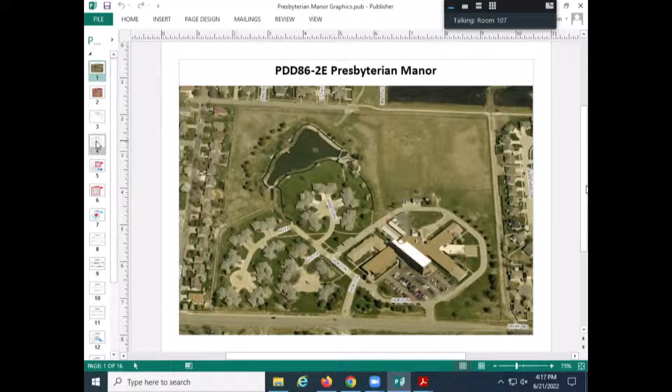Phase 1 was the original plan, as I mentioned, happened in 1977, and that was a plan to go from A1 to R2, and we do have a copy of the most recent plan. Phase 2 happened in 1986 and added 5 duplexes. In 1994, phase 3 occurred, which was an additional 5 duplexes, and then in 1997, 7 additional duplexes were added for phase 4, and then there was a phase 5 redevelopment, really the 5th phase, or 5th rendition of amendments for this particular property, in which a memory care facility was added to the main structure of the facility and the campus.

And so that brings us to phase 5. Our last phase was amended in 2005. Phase 5 is a proposal for 29 new cottage-style, single-family structures in the vacant space north of the existing development. So here on the screen, you've got a drawing of the entire campus, and that shows the 2 main things that we're looking at today: the 29 new cottage-style units, as well as an addition for what they call their wellness center. Their wellness center has things like pools, workout exercise rooms, things of that nature for the residents. So those are the 2 things that we'll be looking at for this particular amendment.

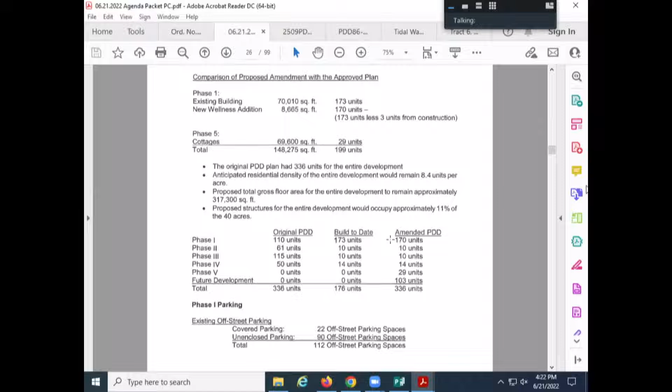Above this table, we also have a breakdown of some of the bulk qualities that the particular property has. So the original development had 336 units. The applicant is maintaining that density, with 103 outstanding potential units being added later. The anticipated density for the entire development will remain 8.4 units per acre, consistent with the original plan. The proposed total gross floor area will be a little over 317,000 square feet, with the overall lot coverage occupying 11% of the total 40 acres of the site, which is less than what you typically would find for a residentially zoned development.

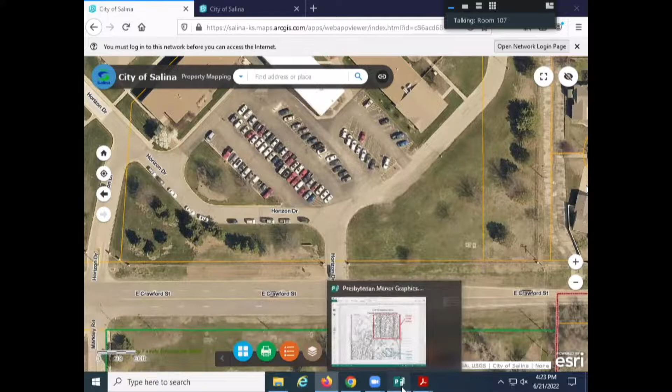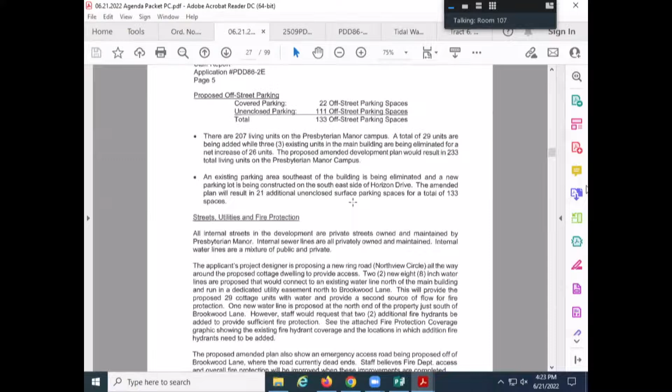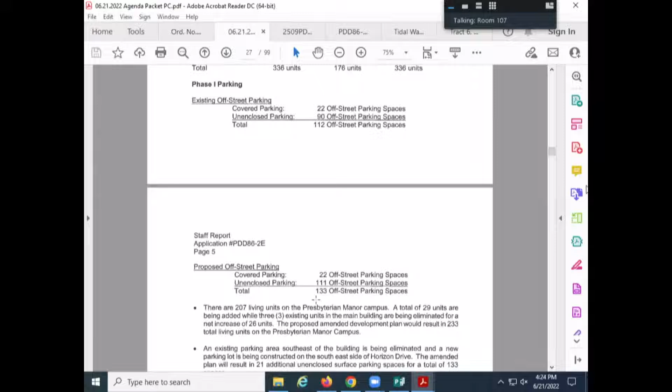So here's a zoomed in example of what we're looking at, and this is the new parking. The parking table created by the applicant for our review today shows that originally there are 112 off-street parking spaces, 22 covered and 90 uncovered. After the proposed addition and replacement of the parking lot, the new parking capacity will be 133 off-street parking spaces.

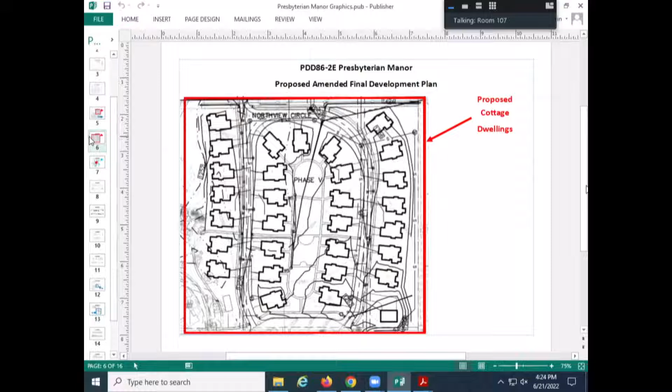When we're looking at streets, utilities, and fire protection, we're looking at what street access is being provided - are they private or public? What water access is being provided - private or public? Same thing with our sanitary sewer and our storm drainage.

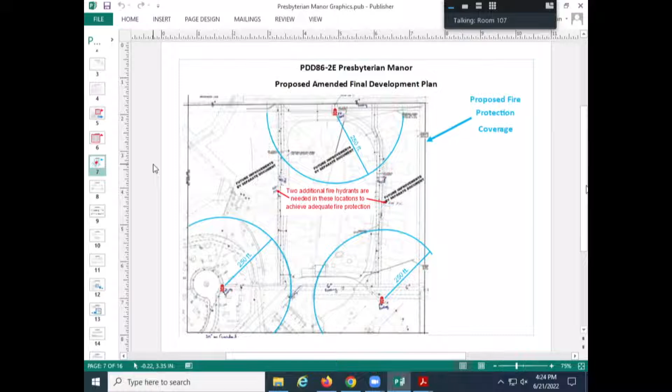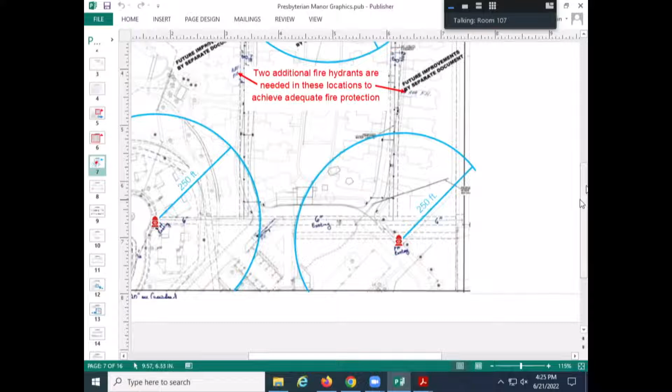On the screen is a site plan drawing showing the location of existing fire hydrants in relation to the proposed dwellings, as well as existing and proposed water lines. Down here on the south side would be the main building. North of the main building, there's an easement for water lines, and in that easement there's a 6-inch water line. The applicant is proposing two 8-inch water lines that would connect to the 6-inch line, run north, and proposed utility easements up to Brookwood, where you have an existing 8-inch line.

There will be a similar parallel line on the west side, so you have two 8-inch lines that connect the 6-inch line existing on the Presbyterian Manor property, looping back into the 8-inch line in Brookwood. That is how water will be serviced to the site - it would be a public line and would require a public easement.

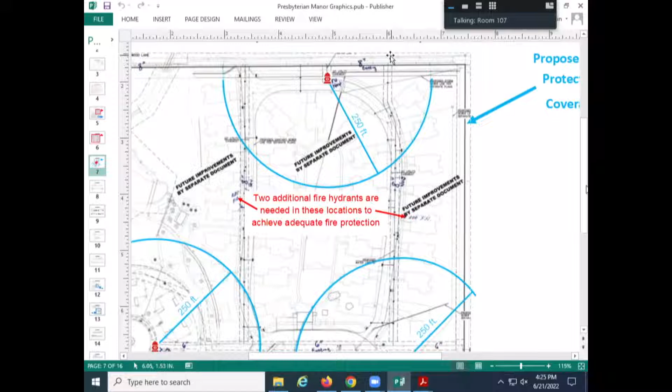One thing staff did note when doing their analysis from both a utility and fire protection standpoint is that while we have good coverage to the south and potentially to the north, we do have a number of units that are uncovered under the current plan. At least 2 fire hydrants will need to be added along that utility easement to have full coverage of all the units being looped around.

For street coverage, there is an existing private drive, and what the applicant is proposing is a drive called Northview Circle that would also be private and would loop into the existing drive all the way around to provide access for the 29 units.

There's also a connection for emergency access onto Brookwood Lane. Brookwood Lane is not fully developed because directly north of this property we have county farm ground, so before Brookwood Lane can be fully built out and constructed, that property to the north would need to be platted with right-of-way dedicated to have the full width of right-of-way all the way to Holmes. At that point Northview would connect directly to Brookwood, but for the time being, the applicant is proposing a temporary fire access lane for emergency purposes.

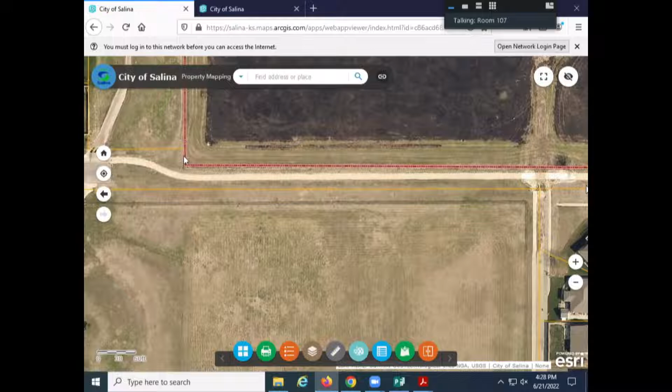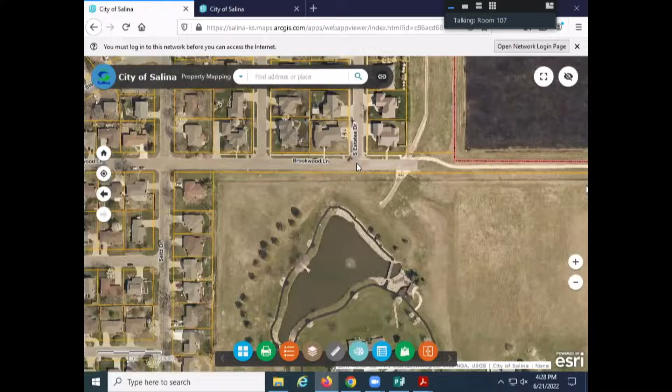You see this pink dotted line - that is the city limit line, and this is all undeveloped county ground directly to the north all the way over to Holmes Road. At some point when this becomes developed, Brookwood would go all the way through and you would have sufficient right-of-way for the street paving, but for the time being, the applicant is proposing a temporary access point in which emergency access could reach the Presbyterian Manor facility off of the Brookwood Lane dead end.

And that's what that looks like here on the drawing.

So when we look at planned development district amendments, we look at whether it's a substantial change from what has been previously planned and approved. On page 6, you'll see some of those criteria.

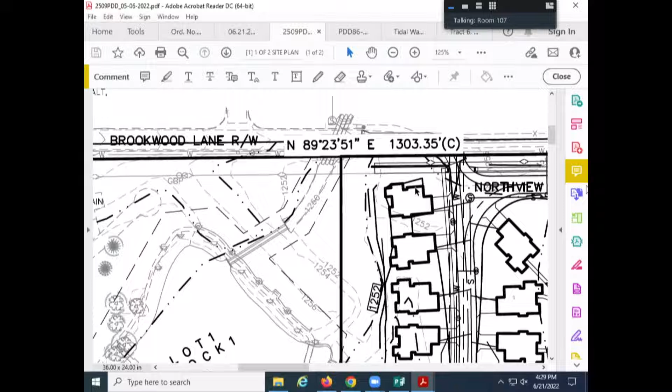As noted when we went over the table provided by the applicant, staff does not see any significant changes in terms of density. We're still looking at 8.4 units per acre, and a lot coverage of 11%, which the R2 regulations would allow up to 35%. So those would not be major changes.

The ordinance itself, the 1977 ordinance, number 8569, staff believes has become outdated over time. If you were to read it, it doesn't give staff, future or present landowners, developers, architects, or designers much guidance on the bulk regulations and how to administer the existing plan of the PDD. So it's vague and requires amending and updating, particularly because of its age and the number of times the existing PDD has been amended—amended 5 times, with this being the 6th.

Staff believes the ordinance should be updated as we go through this process. When we move forward with potentially taking this to the city commission, staff will work with the applicant to produce a new ordinance for the commission's consideration.

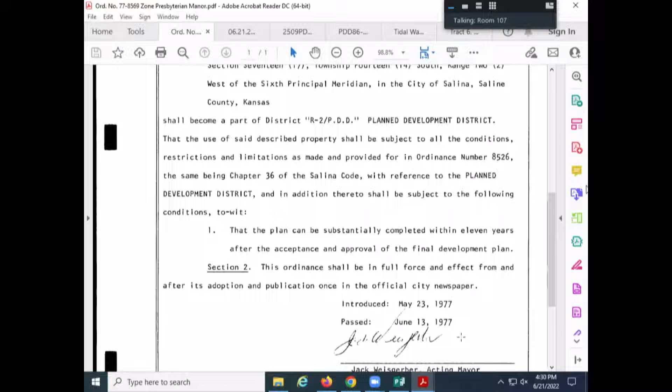Some comments or thoughts staff has with the proposed plan involve some confusion that could be cleared up by the applicant. We'll walk through those items. One is that the plan needs to clearly delineate the boundaries, areas, and square footages of Phase 5, which is brought up because we have two different areas.

We have the 29 cottages on the north side. Staff arbitrarily used a boundary of the north property line, the east property line, and the black line shown on the site plan, with an arbitrary line to the south, just to get a feel for the area. Staff would be more comfortable if the applicant quantitatively defined the specific area we're dealing with, so we can calculate the lot coverage not just for the whole campus, but specifically for Phase 5.

It would also help us identify setback requirements and proposed setbacks. Because of the elevation changes on this property, there's quite a bit of contour change, and those contours on the plan make it difficult to pick up other important lines, such as water lines, sewer lines, curbs, street dimensions, and whether easement dimensions match up with the proposed water lines. Having some layers of information removed, like contours, and making other layers easier to read would be very helpful to staff.

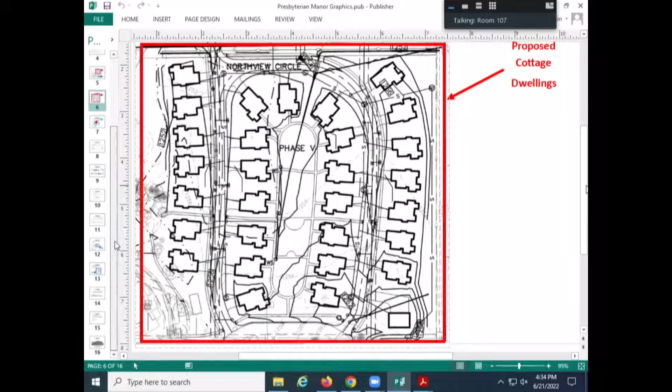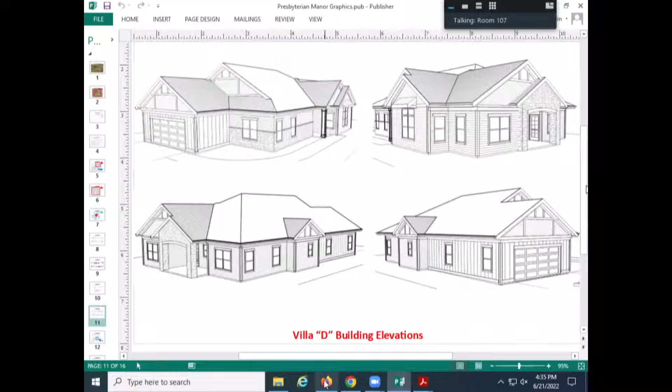So there are 4 different models. They all have different footprints and different building elevations. One of the things staff could help clarify is having the footprints match the proposed dwellings and where they're going to go, as well as having them identified—meaning this is an A model, this is a B model, this is a D model, this is a C—and then having their square footages noted, since they do have different square footages. Having that information more tightly tuned would also help when you get to the point of working with the applicant and issuing building permits.

Number 3, provide a profile of the proposed private streets, including the right-of-way and paving widths, if right-of-way is being proposed, or if they're completely private, at least the utility easement dimensions associated in those areas. It appears to staff that there is a utility easement that runs roughly underneath the street, but they are not completely synonymous—some parts overlap and other parts do not. Having information on what that street is and where the boundaries of the street are in relation to the dwelling units that connect to it would be very helpful.

Number 4, provide a proposed internal private street name for the private streets that connect Horizon Drive to Northview Circle. That is where I'm showing my cursor here. When you come into the Presbyterian Manor, the first road you'll see is Horizon Drive, which goes on the west side and kind of the south and east side of the main facility. There are some other offshoot streets that branch off of Horizon Drive for the previous duplexes developed on the site. One thing the plan is missing is a name for the street that's going to go off of Horizon Drive to the north side of the facility that connects to the proposed Northview Circle.

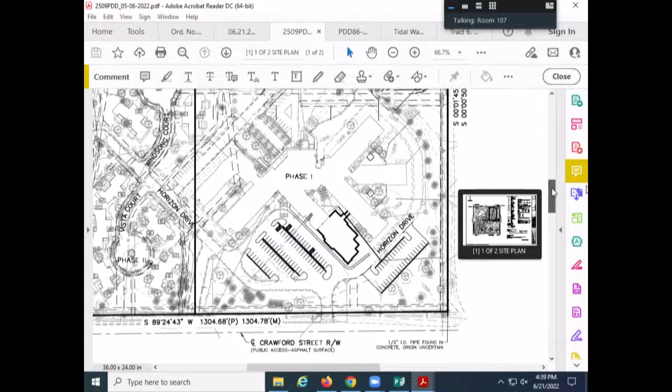At the public hearing, we would also request that the applicant provide staff with additional information on where post-development runoff for Phase 5 is being directed. The campus does have a pond with a dual purpose of stormwater retention as well as recreational use. We would like confirmation of whether this is where stormwater is being run to, and if not, information on whether it's going to the northeast, and how we're going to get the water across the ditch up here.

There is some bottlenecking we've been experiencing with the ditch. There's a drainage ditch that runs north-south and discharges onto this field at a point near this path, and that particular point is kind of a bottleneck or choke point that's currently causing some water flooding or backup in the northeast corner. So we would have the applicant's engineer address that issue.

And then the wellness center itself that is being proposed at the southeast corner of the building, what all that is being proposed for, or what all the uses are. It looks like from the plans that there's a swimming pool and an exercise area, and we would ask the applicant to describe how that fits in with the operations of the facility, if it's open to other people in the public. Some facilities like this have a membership where they have a pool or an exercise room that could be used for the residents, but also has an ability for other people in the neighborhood to purchase a membership to use it. We aren't clear if that's what we're dealing with here, if this is a space that is truly accessory to the facility and reserved solely for the residents residing on the campus.

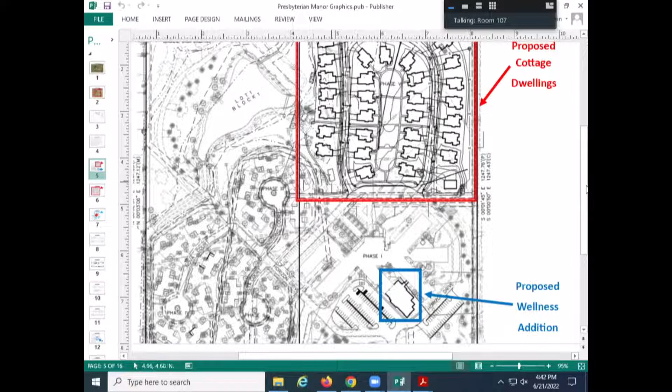Dustin, on phase 5 there's a little rectangular pad in the southwest corner of that drawing. What is that? Let me see if I can get the right one. This here, or are you talking about this? No, that's the southeast, southwest. Oh, that little— I think this is indicating something existing. Let me pull up an aerial photo. Yeah, we'll have to ask the applicant. Is it this here? No, doesn't look like it's oriented right. It'd be about that. We'll save that for the applicant. Sure, yeah.

Any other questions of staff before we hear from the applicant? Yeah, I do have one question for you. So you talked about the fitness facility and whether that was just strictly for residents and staff there, or if it was going to be open to public. If it's open to public, then does that change the parking total numbers required? It potentially could, and so there are some implications with that question.

Because it becomes an assembly space that has its own parking load potentially, where if it's accessory, the presumption is that the people using it are using the off-street parking that's already there and available for the residents. We're not having any duplicative or additional parking required. And so what's the total square footage of that new facility currently?

We would have to look into it deeper to figure out what the off-street parking would be if that were the case, because what you're doing is getting into not just planning and zoning implications, but building code implications, because all structures have an occupant load based on their use. Typically, when you're dealing with a swimming pool or a recreational facility or a weight room, things of that nature, you have a type of assembly space, and those can have hefty occupant loads depending on how they're designed. So that's a vague answer to your question, but there's just more information and more work that needs to be done in order to make that determination.

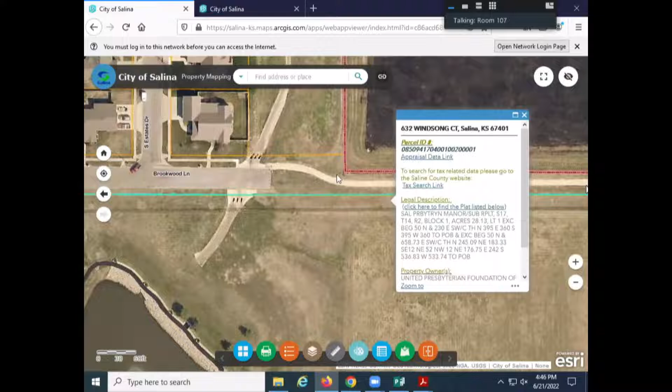We do that in temporary instances where we know that it's eventually going to be replaced with something more permanent. The purpose of that is, again, to provide walking access for the residents or the children over here on Prairie Lane and Quail Hollow to get to school. So at that point in time, once you get to the point where you have development on the north side and Brookwood Lane is carried all the way through, you'll have a sidewalk on the north side of Brookwood to tie into the existing sidewalk, and that temporary path will no longer be necessary.

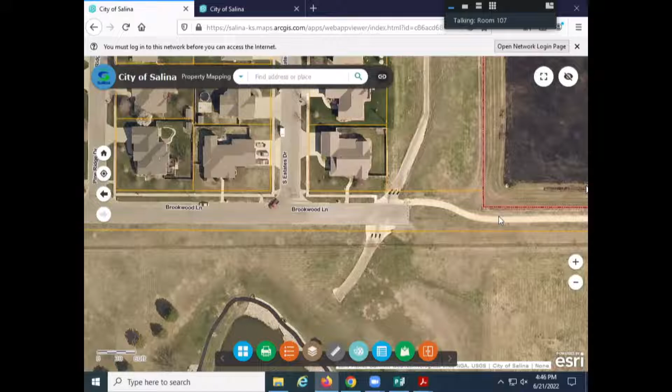Thank you. Hey Dustin, one quick question. You mentioned the internal private street name connection from Horizon to Northview Circle. Is there not already a street there from what I saw on the overhead view?

I don't think there has been an identified name for this specific stretch we're talking about, and I think that will need to be added. What you don't want is people coming in on Horizon Drive looking for Northview Circle and not finding it because there's no street sign where they're supposed to turn. Either that needs to be an extension of Northview Circle, or it needs its own street name, so that whether making deliveries or responding to a 911 call, you know you're on Horizon Drive, need to turn right on something, and then get to Northview Circle. We can't have a gap with no name between Horizon Drive and Northview Circle.

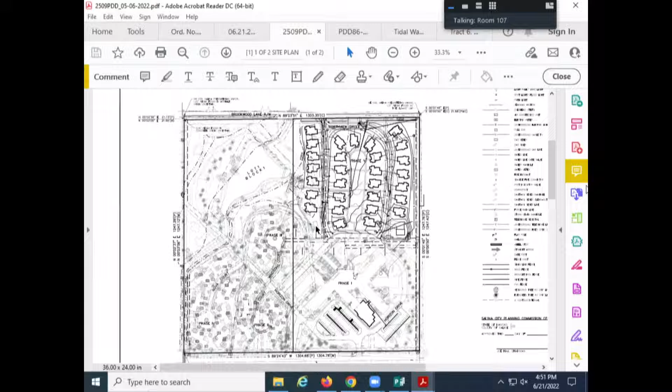You had a question about the rectangle in the southwest corner - that's a proposed pickleball court. As far as the southeast, I believe that's a maintenance building, though I don't know the exact details, so if anybody online wants to add to that, please do.

This is Mike Miller with AG Architecture, I can add to that. There's an existing maintenance garage in the bottom of that center court area of the new villas, used for general maintenance storage. To replace that and allow the new center court and villa plan there, we're relocating it to that location - just a freestanding, one-story building, really another garage.

I guess other than that, I'd open up to your questions. Dustin, with what Justin shared about the layout with the cottages, what they've shown is the maximum, the biggest dwelling size. Could that, for numbers 1 and 2 on page 7, be acceptable for now to get approved, or do you need something more refined?

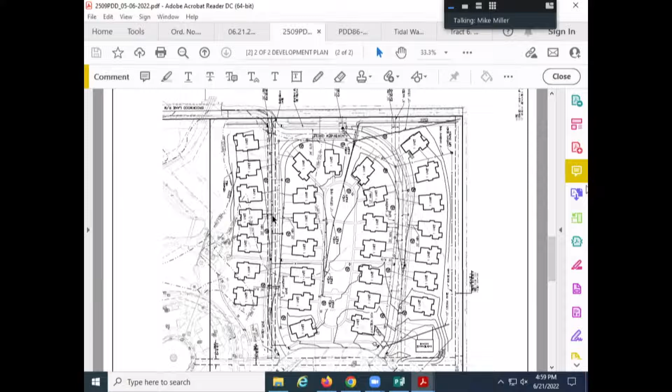Yeah, so generally keeping that spacing with the largest footprint — the reason we used this one is it's very similar in footprint size to the C plan, but it has a side entry concept, which creates that sidewalk on the side. So from left to right, as you're looking at the villa, it's the largest width, and then also front to back coverage. So we used that concept to set minimums, and as you've described, I think we should have probably provided — there's a couple there, a 30-foot minimum at the driveway I see on the plan — and I don't see a lot of dimensions between them, which is obvious as to why you're asking the question.

I think I see one there that has a 13-foot minimum. One of the advantages of a planned development district is that it provides some flexibility to our standard R2 standards, which have rather rigid setback requirements. So what we're trying to get at is this is designed for flexibility, but we don't know what areas we might need to be flexible with in terms of setbacks or any of those things.

Another question that's not clear is in most of our developments with private streets, there's a nominal right-of-way area behind the curb line that's not part of anybody's building lot, for laying utilities or having mailboxes or other things. We can't tell whether the curb line is the right-of-way line or property line for setback purposes, or what the width of Northview Circle is—whether we're supposed to be measuring the front setback from the curb line or some other line. That goes to our question of whether there's any lot area that goes with the footprint, or if it's just the footprint and everything else is common area for Presbyterian Manor.

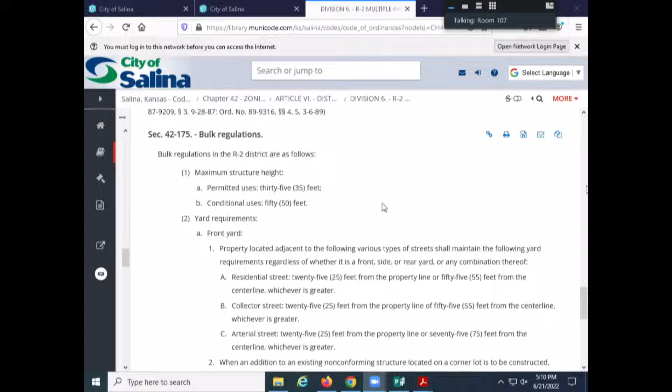So this is the R2 district regulations that has the permitted uses, conditional uses, and then also the lot requirements and the bulk regulations. The bulk regulations are probably, in terms of all the development standards we've been talking about, where we're struggling the most, because those bulk regulations are the criteria that establish the geographic relationship between the proposed units and other site improvements. So we have structure heights, maximum 35 feet, and all of the units proposed are single story, much less than the 35-foot maximum.

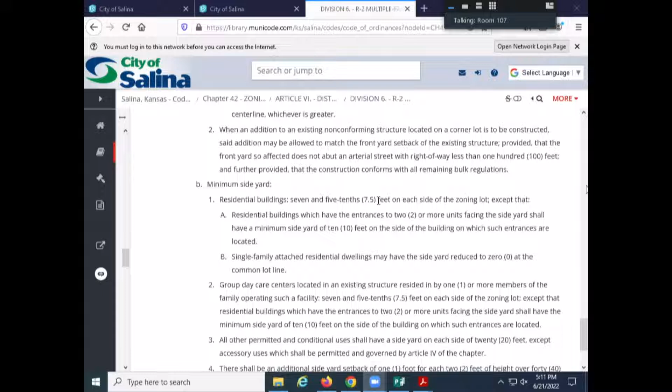You have 25-foot front yard setback requirements. You have 7.5 feet side yard requirements, which if you have two units next to each other, comes up to 15 feet in between them. And that's something we would need to talk about. Then you also have a 25-foot rear yard setback requirement.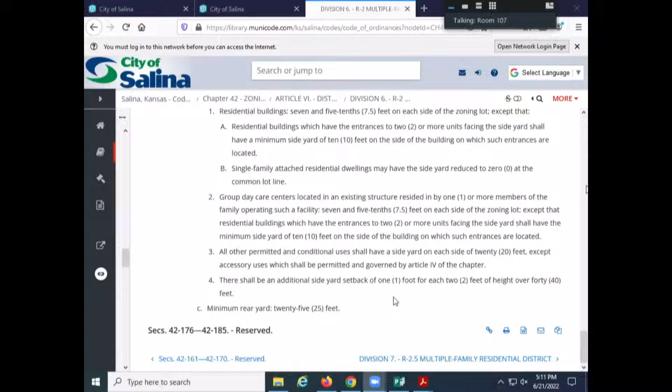The tricky part when you have a planned development like this is that you don't have a lot of those lot lines or reference points or zoning lot dimensions or boundaries to work from, like you do on a single family or regular two-family development, because you have a campus with a lot of these units kind of floating around inside there. So having at least parameters for the reference points we do have, such as the east property line, north property line, the proposed street, and the relationship of dwelling A to dwelling B for side yard setbacks, would help us.

So since it is a PDD, we can set the minimum requirements of the R2: a 25-foot setback in the front, 25 in the back, 7.5 on the side. We can set that minimum requirement for all of these units going into it.

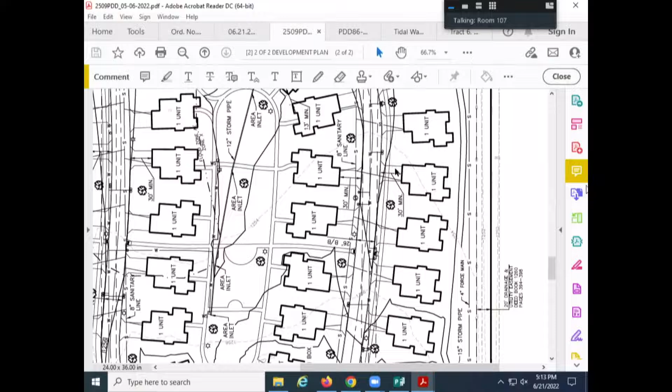Normally, what would happen is we'd review this and report to you that the applicant is requesting, say, a 20-foot front setback instead of 25. But we can't report that because we don't know if it's a 30, 25, or 20-foot setback, or if all of them are set back a minimum of 25 feet with separation between them. On the units on the east side with a property line to the east, we can measure a setback from that property line, but for units in the center, we don't know what point to measure from, or if the sidewalk is the measuring point and every unit's going to be 10 feet from the proposed sidewalk. We just don't know those things.

And that's the challenge. You could approve this subject to all the cottages meeting the R2 development standards, and then as we get into more detail we find out they in fact don't or can't, and we're coming back. So really, what Commissioner Mikesell is asking is what our comfort level is. Our comfort level is only to approve this subject to the R2 development standards Dustin just gave, and then every one of their units will have to conform with that, and if it doesn't, it'll have to come back.

Personally, my comfort level with you guys administering this is fine. If we say it's going to be that, I'm okay with it. And they're talking about turning over dirt in the fall -- I think that's pretty ambitious, and probably requires us to make some decision at this level.

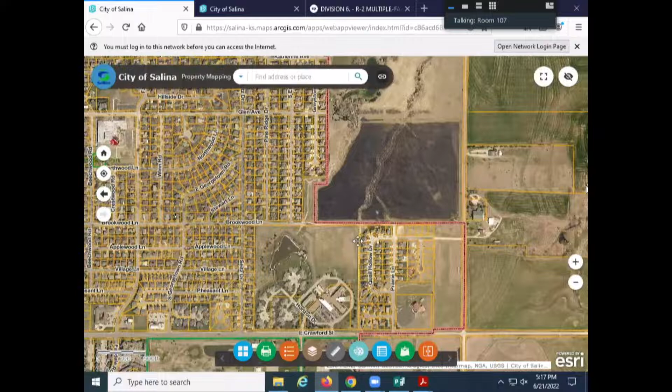Do we have an answer to that today?

Yeah, we're pretty far along. We've got nearly final plans, so we know what's going on. I don't necessarily agree that there's a lack of detail, because if anything there's so much detail it's hard to read. If you look at the checklist for everything they want put on this, we tried our best to show it, and contours are included. It's on the checklist. Trying to show all the dimensions you've talked about would be almost impossible. We tried to show the minimums—that's what we're asking for, and that's what's on there. If it's a matter of clarifying things, we can put it in a table, but it is there, and we know we've got a good solid plan of what we plan on doing. We feel confident it's going to work.

I can address these questions on the runoff and all that. Dustin, if you could bring up the zoomed in, or the second page of the PDD. Do you have a pointer or something I can use? Dean, I think, might. So essentially, the site is divided pretty much the way it is now.

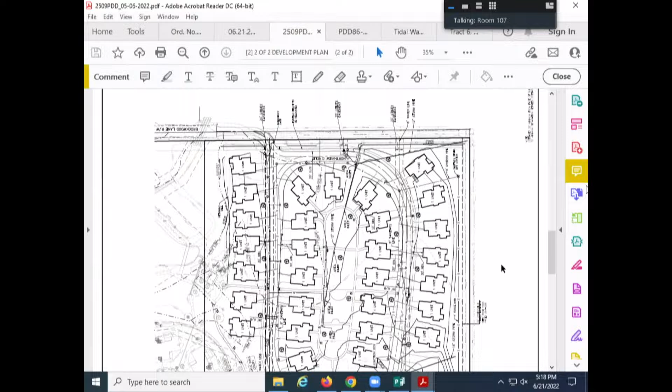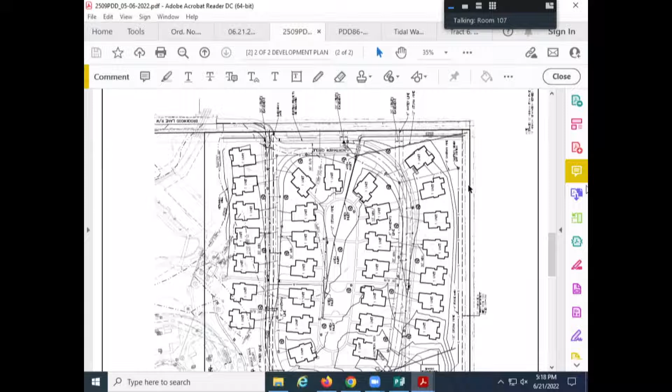There's really a high point that runs down the middle of it existing. So right now, this western half drains down here to the existing stream and the structures underneath the road here. Everything on this eastern half winds up getting into this concrete lined ditch as it is now. Essentially, we're sticking with that basic drainage pattern.

We had a DRT on this project about a year ago. We talked with staff. Detention was brought up—we've got a very large pond here. I requested if they had any drainage reports on whether any detention was intended for this originally. It was all planned out in 1977, prior to detention being required.

Staff was not able to find anything necessarily on this pond as far as it being sized, but it does provide detention for the site. We were not, at that time, instructed that we were going to have to provide detention, because nothing was designed originally with detention, and that we weren't going to be held to having to provide detention for this. Because of that, we tried to stick with the existing drainage patterns.

I'm not up to speed on what issues there may be here. We are tying everything into the concrete lined ditch, so it will get to that point. If there's issues now, it's all outside of our property—it's kind of out of our control. I don't know what we can do about it if it's outside of our—if this is a drainage easement, that's really not our responsibility to maintain. That should be on the city.

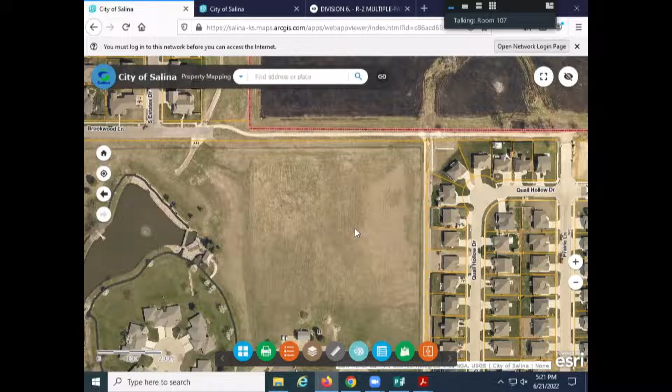As far as the access road coming in, the plan is for that to be strictly for emergency access only. It will be paved with gravel for the minimum 20-foot width, able to sustain, I believe, a 75,000-pound load. There will be an emergency gate with a Knox box to only allow emergency vehicles.

We will pretty much be adding more gravel. We're making sure that we get this existing trail tied back in—the grades will work. We'll actually have to replace part of it just to make everything work.

Is there any other questions? We try to show as much as we can on this, but we're kind of limited. We do have plans, if that would help. I'm sure staff's going to have to review that.

As far as right-of-way, we did not show any right-of-way. We didn't plan to have any designated right-of-way, and we would have a minimum setback off the back of curb to the front of the houses, which we showed as being 30 feet.

We plan for the water line to be within a public easement so that it can be maintained, because that will be the only public utility on site. The rest of it, the sewer, everything else will all be private and the responsibility of the owners to maintain. So we didn't see the need in designating any kind of right-of-way for that.

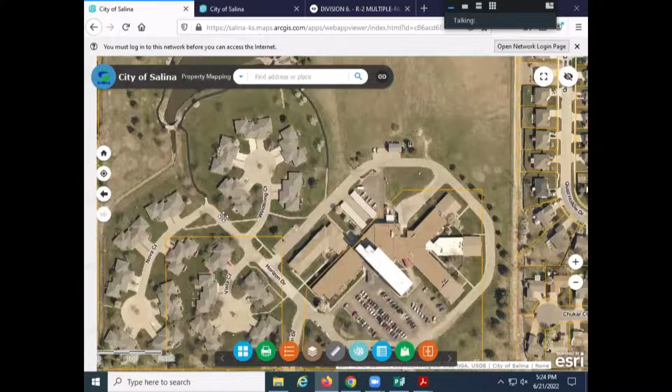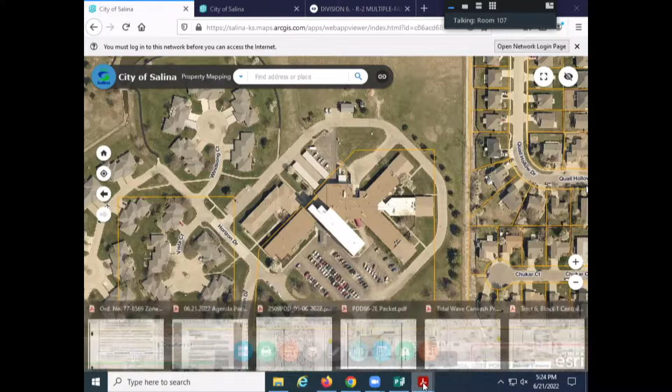Right, through that area. So you said that they could extend for what the new one's going to be, and then bring it down and back around both ways, all the way back over to Horizon Drive? Well, ideally that loop around would have a name, but...

There needs to be some connection, an intersection that can be identified where vehicles enter, because there's a gap between Northview Circle and the rest of the private street system. So there's no way for anybody coming in from the south to know where Northview Circle is, because there's no connection there. If it was only coming from Brookwood, that would be fine, but there needs to be some name so that when you come in Horizon Drive and turn right on something, it has a name to connect to Northview Circle. That would make Google happy.

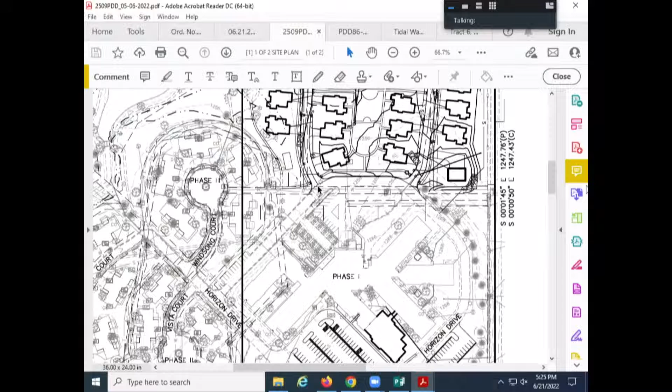So from our standpoint, in terms of postponement versus action, if we can get information that we're told is there for us to see but we just can't see it - if it could be put into the record what the maximum footprint is that the commission is being asked to approve for the cottages, what the minimum setback requirement's going to be, what the minimum side yard's going to be, and what the minimum rear yard setback is going to be for all the cottages - so that we have those parameters, because at some point they're going to be applying for building permits, and we can't review building permits unless we know what the parameters are for the construction.

Surely somebody has the maximum square footage. I'm sure Mike can provide that. I can go right down the line of the 4 units just to give you an idea of the square footage we're talking about.

There's 2 numbers associated - one is the living area and one is the overall footprint, including the garage. So Dean, which one is important to you? It's the amount that's covered by roof, so we consider the garage to be part of the footprint. Have you got those numbers?

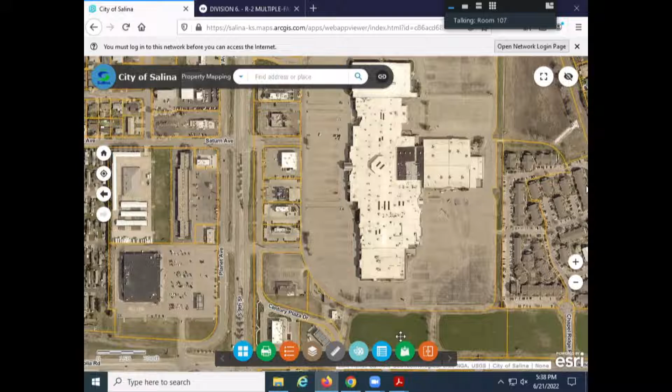So the applicant is New Potato Holding Company, LLC, and they have a contract to purchase what is formerly known as the Kansas Buffet, or the Coyote Canyon restaurant before that. That's the building structure, parking lot, and everything within the yellow, orangish lines you see — this is our subject property. Currently, the property is zoned PDD C3, which allows restaurants and many types of retail activities taking place inside a structure, but does not permit car washes. The applicant, who owns and operates car washes, is interested in redeveloping the site, removing the existing building and all existing site improvements, and reconstructing the site with a car wash.

This is the existing site plan showing the restaurant with all the parking stalls on the site. The existing restaurant is a little over 9,000 square feet, with 133 off-street parking spaces. What the applicant is proposing is an automated car wash with a north-south orientation, as well as 39 off-street parking spaces with vacuum apparatus connected to them, and canopies covering a majority of those parking spaces.

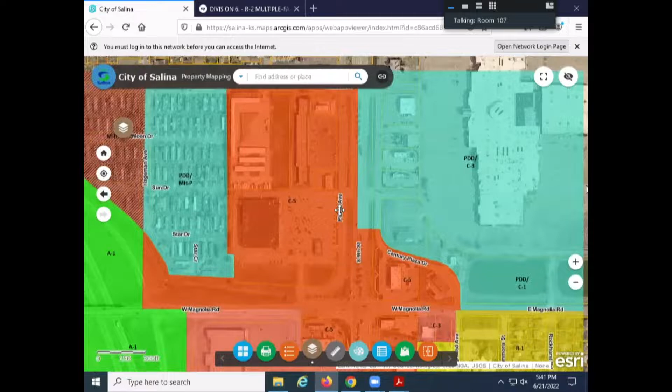From Otto all the way down to Magnolia on the west side, we have C5 zoning, where on the east side of South 9th Street, we have the Central Mall and the outlots, which are PDD C3, with the exception of the C5 zoning, which is directly south of the subject property.

So the subject property is where I have my cursor here, and you'll see that to the north and to the east, we have PDD C3, and then to the west and to the south, we have C5. So we do have some C5 zoning adjacent and within the area of the proposed car wash.

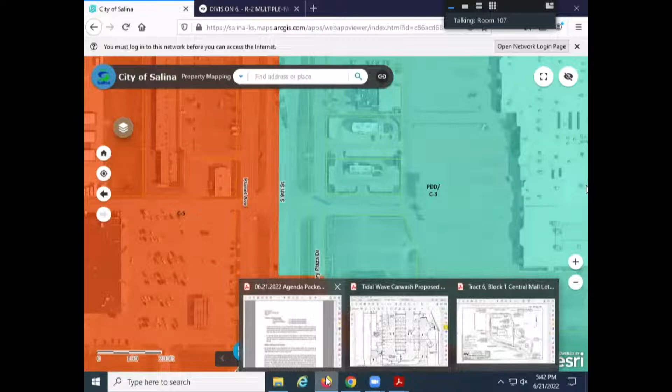On pages 4 and 5 of your staff report, we do have the bulk regulations and development standards for C5 that could be reviewed, and what planning staff will summarize them by saying that when we look at the site plan that's proposed, the plan does meet all of the zoning requirements for the C5 district.

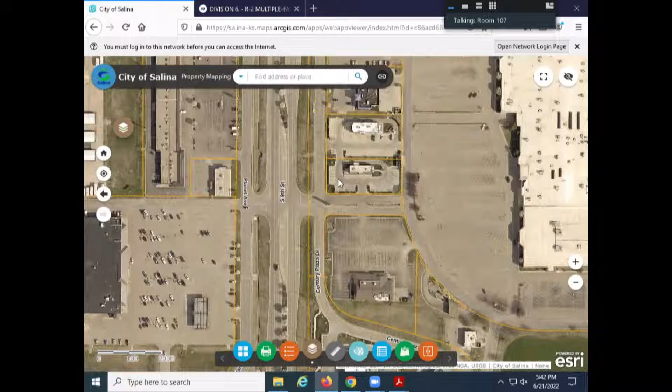The most notable difference that we have with C5 from C3 is that we have additional uses that the C3 district doesn't have, primarily things like automobile dealerships, and in this case also car washes. A lot of those uses are tied towards outdoor display or sales of some type. So that's one of the primary differences between C5 and C3: an expansion and intensification of uses, as well as outdoor storage and display being allowed in the C5 district where it is not allowed in the C3 district.

Because this is a planned development district, you are also tasked as a board and commission to review the proposed elevation drawings that are submitted, reviewing the materials, reviewing the design, the color, things of that nature, the general aesthetics of the proposed structures.

Building design is usually not part of our zoning ordinance. The exception is in the South 9th Overlay District, the North Ohio Overlay District, and then in planned development districts, which is what we're dealing with in this particular case.

When you look at the suitability of the site for development under the existing zoning, the property has been zoned PDD C3 since it was originally developed and historically been used as a restaurant. And so the applicant believes that even though it's been used successfully as a restaurant in the past, the property itself is more suitable for intensification to C5 zoning.

Particularly so that a car wash could be located at this site, which they feel is appropriate given the traffic nature and the number of vehicles that travel along the South 9th corridor in this area.

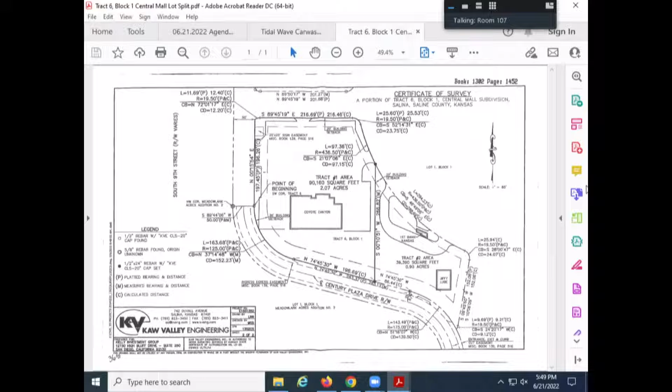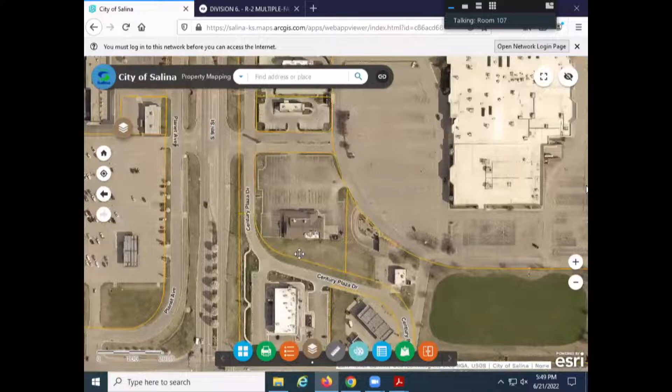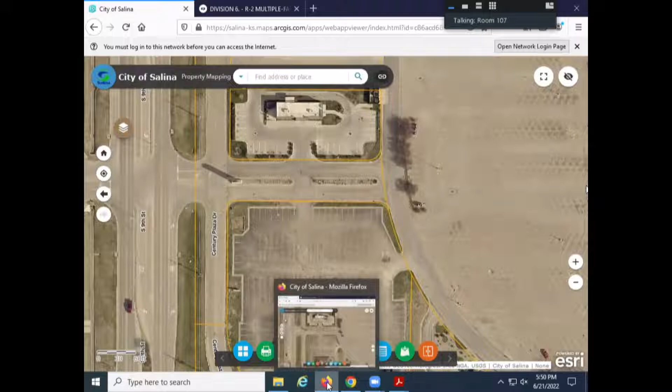The street access for the site would remain largely unchanged from today. If you were to go to the former Kansas Buffet, you would enter the access road on the north side of the property that accesses Central Mall from 9th Street, with an existing curb cut, and there's also a curb cut along the ring road to the east. In the aerial photo, you can see a break in the median on the access road that accesses Central Mall. It would line up exactly where it is today, and there's also an access point off the ring road for Central Mall that would be retained and reused. So there is sufficient access for the site.

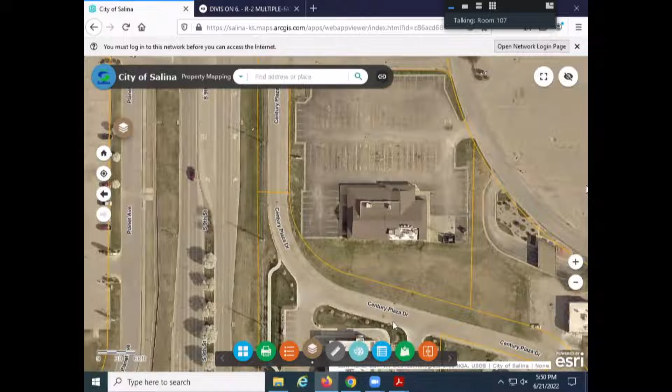9th Street between Otto and Magnolia carries almost 20,000 vehicles per day, but we don't see this particular development having any negative impacts on that existing traffic pattern because of the way the property is accessed from the private drives to the north and east. There is no access off of Century Plaza Drive, the private road running to the west of the property. So really what we're looking at is maintaining the existing traffic pattern for the site.

Building orientation: the building being proposed has a north-south orientation, and we have elevation drawings showing the exterior. Looking at the property from 9th Street, you'll notice the majority of the front surface of the elevation is primarily glass, and on the north and south sides there's what appears to be a masonry block. I'm not sure if it's stone, tile, or CMU — that's something we'll have the applicant clarify.

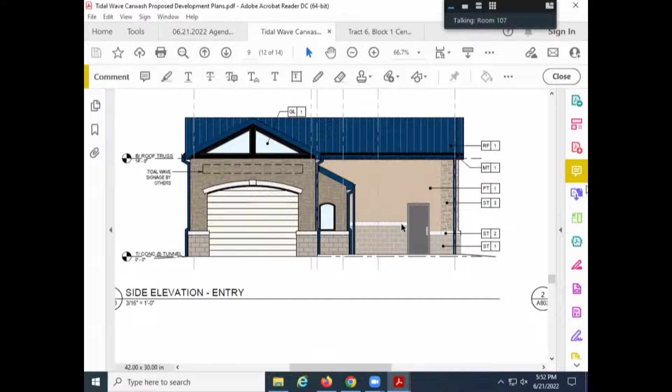Above the CMU, on the north and south sides where you enter and exit, you'll have some masonry stone with arched overhead doors, and then a combination of EIFS, which is a stucco-type surface product — not exactly stucco, but an insulated form of stucco — combined with masonry stone and a cap on the wainscoting, either that CMU block, smooth surface stone, or brick identified along the bottom. That would be true on the south elevation where you enter, and on the north elevation where you exit.

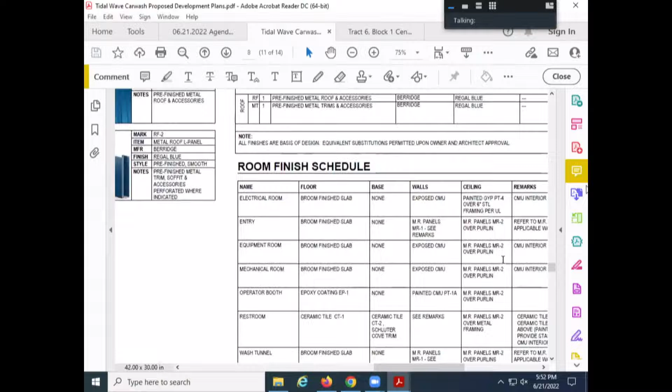So this would be the exit, and then it's true also for the east elevation. So this would be the back side or the side that would face the parking lot where you have all of the vacuum stalls, and so you have a combination of glass frontage there, EIFS, masonry stone, and then whatever this block is, and then you have what looks like a blue corrugated roof of some type of metal. And so that would be the actual car wash itself.

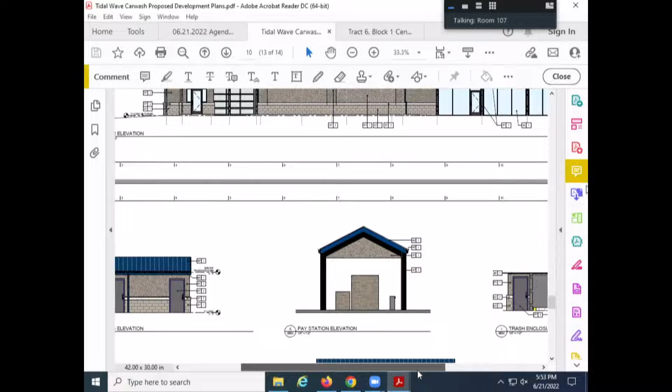Then there are two vacuum buildings. So what is being proposed is, in order to cut down sound as well as to increase longevity of the vacuuming equipment, they're actually proposing buildings to house the vacuum equipment, and that those buildings are going to be similar in style, where you have the wainscoting that is capped with the EIFS and the same blue roofs, and then you also have the canopies that cover the vacuum areas, and that's what we're looking at here. We got pay stations as well as canopies that are covering the vacuum stations.

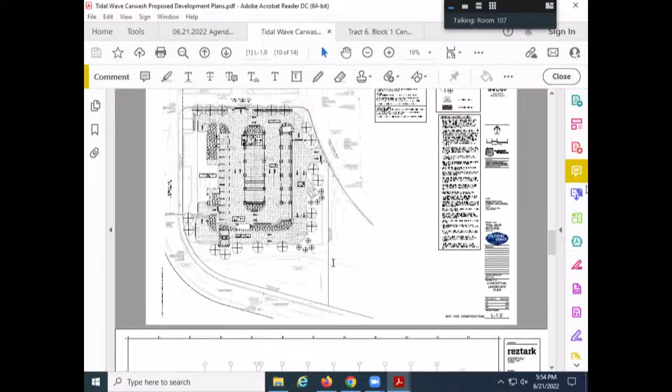So those are some elevation drawings of the structures and the building orientation. The actual buildings themselves all meet or exceed the minimum setbacks.

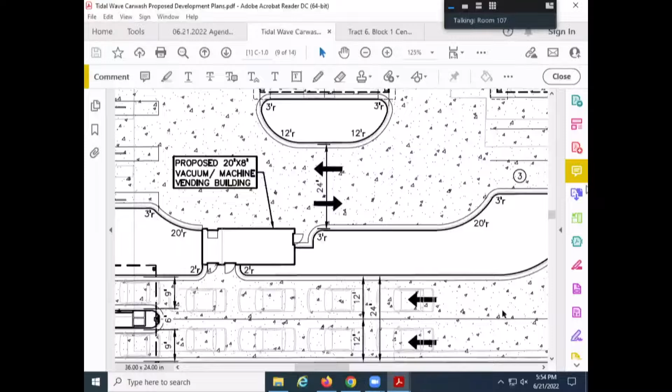And then that takes us to the off-street parking. So for automated car washes, the zoning code requires that there be 6 stacking spaces, and the plans as proposed, if you look closely, you'll see kind of these ghosted gray outlines of vehicles are showing 10 parking spaces, which exceeds that amount, and staff would note that you can probably at least double it and get at least 20, because with the two stacking lanes, you have a tremendous amount of stacking area as you enter the site. So stacking and off-street parking shouldn't be a problem.

There are 3 off-street parking spaces for employees that are just parking spaces that don't have any vacuum connections associated with them. There's also 2 handicap accessible parking spaces, and then all of the balance parking spaces are covered canopy parking stalls that have vacuum access.

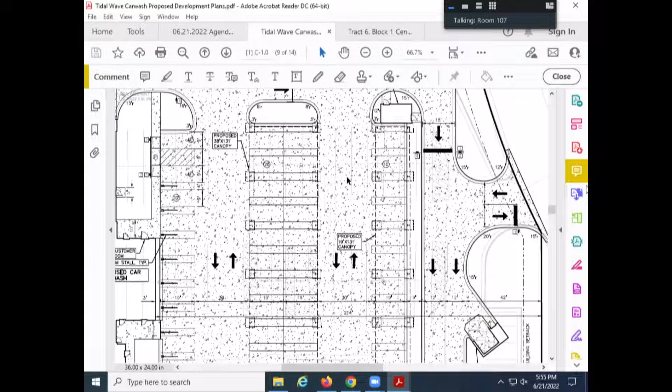Loading, unloading, the zoning code does require one 10-foot by 25-foot loading, unloading zone for supplies being brought onto the site. So staff would ask the applicant to show us or indicate the location of where that particular loading, unloading area would take place.

We do have a landscape planting plan based on the amount of street frontage that we have, because we do have 3 street frontages. You have a street frontage on the north, you have the Central Mall Ring Road on the east, and then you have Century Plaza Drive on the west. The site is required to have over 12,700 square feet of front yard landscaping area, and that is green space within the front 25 feet of the property.

The plan proposes 16,596 square feet, so it does exceed that requirement. That breakdown of 1 tree unit for every 500 square feet of required landscaping also requires the site to have 25 tree units, and that is an area where staff will need to work with the applicant to better understand what plantings are being proposed and confirm that we have enough tree units in the front yard setback area.

Specifically, we have a legend on the plans that I'll zoom in on here that has 2 different symbols for front yard trees. Staff doesn't know what those trees are, so we don't know how to identify them as shade trees or ornamental trees or what kind of trees we're dealing with. So we can't tie what we call a tree unit value to them.

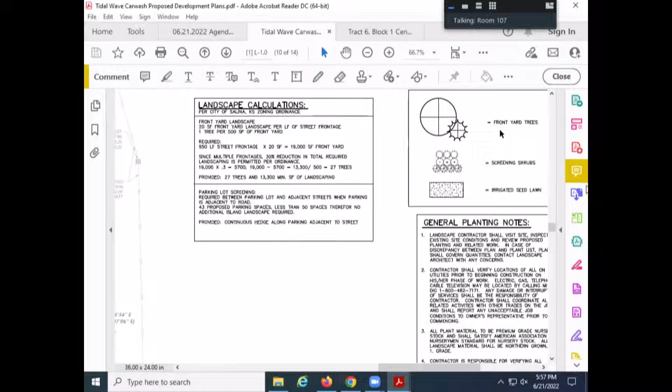For instance, a shade tree is worth 1 tree unit, where 3 ornamental trees are worth 1 tree unit. So it really depends on what kind of varieties are being proposed, on how many tree units are being proposed on the plan, and then all of those tree units, in order to count towards the front yard landscaping, would have to be in the front 25 feet of the property.

So there are a number of tree units on the east side of the drive coming into the site, as well as some tree units on the south side of the drive, where you have the stacking, that are not located in the front 25 feet, that they would have to ask the Planning Commission's permission to allow them to count towards front yard landscaping, even though they're not in the front 25 feet, or they'd have to amend their plan to make sure that all of their plantings are in the front 25 feet.

Staff would note that there is a large area in the primary front yard, which would be the front yard along Century Plaza Drive, that also faces 9th Street, where there is no proposed plantings at all that would need to be addressed and looked at.

That takes us to signage. The C3 district allows for 4 square feet per lineal foot of building frontage, and the Central Mall PDD limits monument signs or freestanding signs to ground signs of no more than 8 feet in height. If you drive down South 9th Street, you'll notice that all the restaurants and outlets have lower profile monument signs of no more than 8 feet.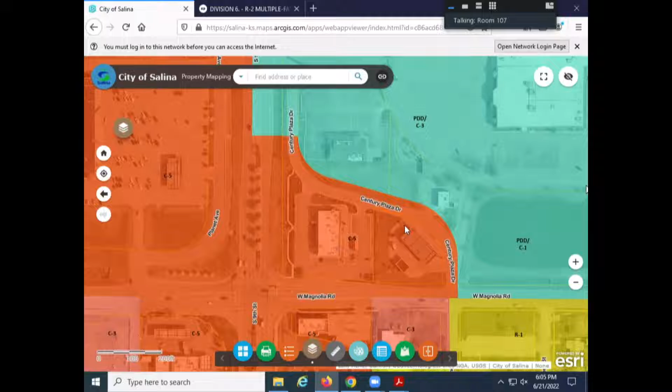You also have the convenience store south of Century Plaza Drive - that's C5 too. How long has that been zoned C5? Was that one where, when the building went in, it went through a rezoning? No, if I remember correctly, the UMB Bank site that was here before redevelopment was already C5, so there was no rezoning necessary when that strip center development replaced the former UMB Bank.

I believe that C5 zoning, or a predecessor under the prior zoning code, has been zoned commercial longer than the Central Mall. So some of that zoning predates the mall. The mall site was agricultural when it was proposed, but that commercial zoning was already there on the corner prior to the mall's development.

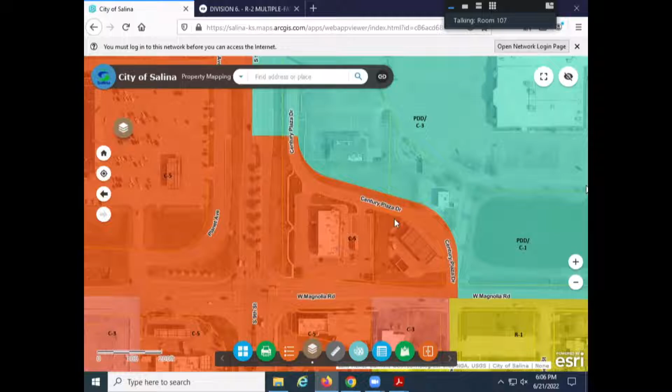Okay, thank you. Any other questions for staff? Okay, so comments from the applicant?

Good evening. Hello? Can you hear me? Please state your name and address. Sure - Leslie Accardo, 1849 Pond Run, Auburn Hills, Michigan.

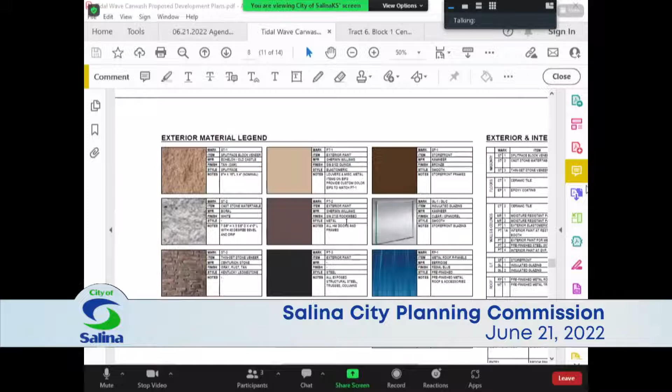Any comments on what staff reported? Just a couple things - this is not a 24-hour operation, they have regular business hours, I don't know exactly what they are, but it's definitely not 24-hour. The materials for the building were on the floor plan page of the packet - we have some EIFS, some split-face CMU, and a stone material, along with blue canopies in the middle. Yep, right there - those are all the materials. Thank you, Leslie, that's helpful.

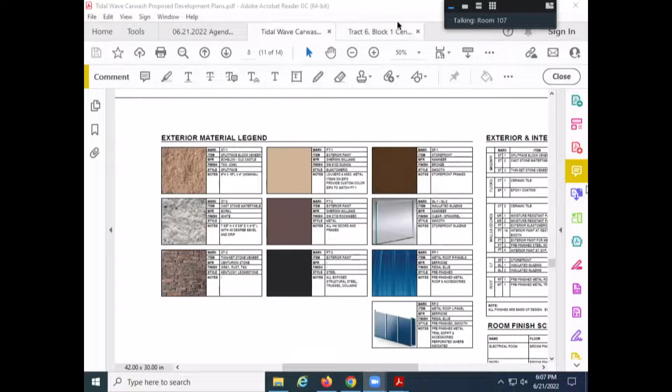Could you comment on the thought process for concentrating more landscaping on the off-side front yards than the primary front yard on the 9th Street side? Absolutely, that can be adjusted. One thing Tidal Wave likes to do is leave the car wash side open, so people driving by can see the cars going through the wash - it's part of their advertising. But we can make adjustments, adding additional trees since the smaller trees shown are ornamental. We were also trying to give the space to the south more interest, since there's not much going on there right now. Their idea is to frame the building with landscaping and leave the glass portion open to view. Ideally, that would be the case, yes.

Any other questions for the applicant? Is staff looking for any other clarification? I think you had a question about loading activity, Dustin? Correct, yeah. We haven't designated any specific areas, but typically that would be done within any of the vacuum stalls, as it's very rare that they're all busy, so we'd typically utilize the vacuum stalls as a loading area.

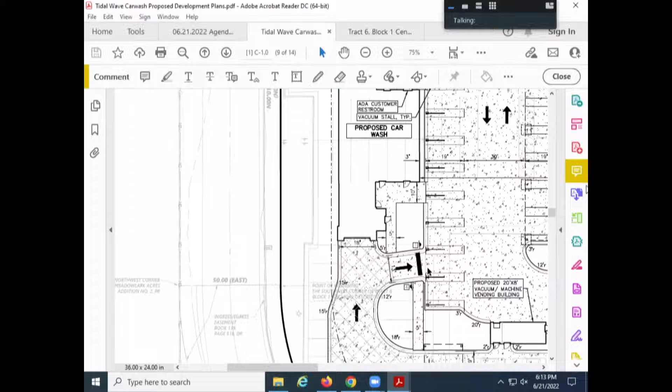So how would that be signified, so that if I pull in there to vacuum, I don't block your escape route? That is a great question. I mean, we could definitely hatch that out or stripe it instead.

Leslie, one of the recommendations on our report is that a permit for this project be obtained within 18 months of approval. Does that fit with your timeline? Yes, it definitely does.

Any other questions for the applicant? Do we have anybody online for the public? It does not appear that we do.

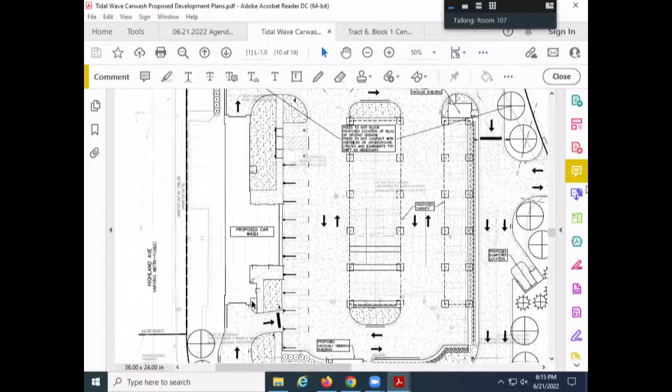So we have a number of trees being proposed on the south side of the driving aisle. We also have some on the east side that are not in the front 25 feet. And then you also have this barren, open area east of the car wash between Century Plaza Drive and the building structure that doesn't have a lot of landscaping.

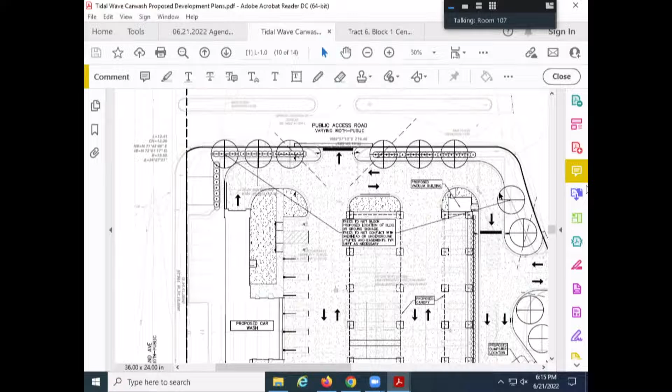Staff would ask for feedback on how you would want staff to administer the code in this particular case, and what your expectations are if you were to approve this plan and ask the applicant to provide a revised planting plan. What specifically do you want to see?

I love the way it's set up. I've seen these before, and I know they use that glass for marketing, and it's a perfect opportunity for marketing right there on South 9th Street.

So I was actually going to ask the question, what we needed to add into this to give leeway to staff about that 25-foot immediate front yard requirement.

So there's a few things you could do. You could request low growing vegetation in the area versus trees, with a certain element counting towards the front yard landscaping. You could also approve the south and east areas counting towards the landscaping requirements, even though those technically aren't front yards. You could allow some of the landscaping to be distributed in the front yard area, but further south and along Century Plaza Drive, so it still dresses up the site and adds good street frontage, street trees that aren't actually street trees, but a good street corridor landscaping there.

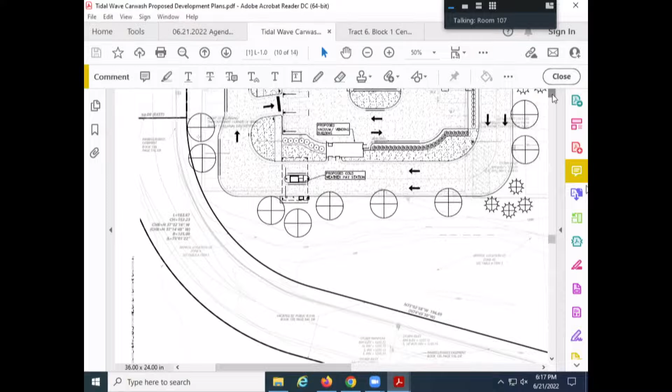There's a few options that you have. It's kind of what you feel comfortable with, what you think meets the spirit and intent of the landscape regulations. If we're deviating from the strict application of the regulations, staff just needs to know what is acceptable and what isn't as we work with the applicant on their final plans when they submit for a building permit.

Dustin, what do we do for Discount Tire up there? Well, for Discount Tire we use the strict application of the landscape regulations, and that's what we've done on all the outlets along 9th Street to this point, along the Central Mall outlots.

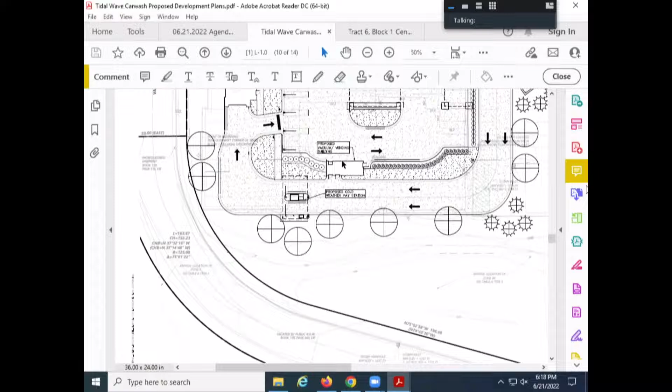Can you scroll south on that, please? That's good. I'm just seeing where their tree placement was on the south side, which I think is good. If you just got your car wash and you're out there vacuuming, a few of those trees can block the southern wind and dust from blowing on them. And to me, that kind of goes with the intent.

I'm all for the marketing value of showing what's happening there, and if we're going to discuss this a little bit, I'd probably be in favor of some low plantings. I wouldn't want just grass there only, but move some of those trees farther along the south. And the east side, use some of those too.

So my question would go back to the applicant then. Obviously the west elevation drawing shows the glass all the way down to the ground at that point in time. Can you bring that elevation up? Sure. Yes, obviously it's not your first one that you've done.

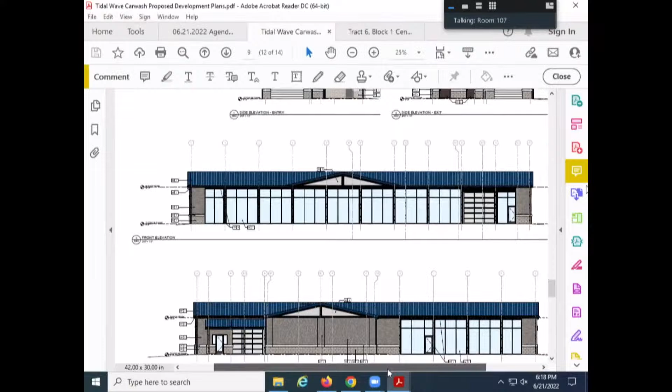Have you had situations where other communities have requested plantings along this side? I understand why you're trying to do it, but because we have been fairly strict along this area with the requirements for plantings, unless there's a reason we shouldn't. We don't want to put a bunch of trees, but if we can put some low plantings, bushes placed throughout, maybe not covering the whole thing, you'd still have your opportunity for marketing, but it still meets our requirement within the city.

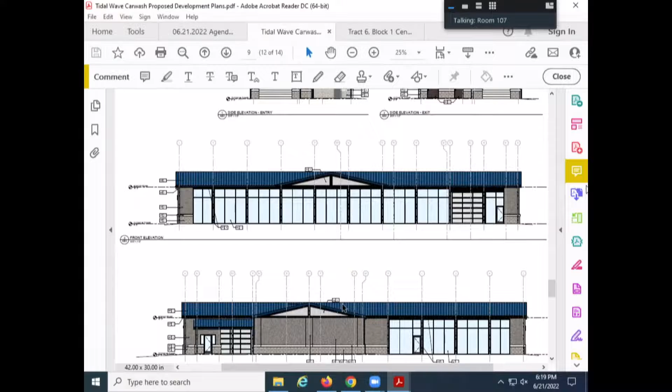Do you have objections to that? Not at all. Okay, then I would suggest that we do that, because I know that was, at least with Discount Tire, there was a large discussion on those plantings and how that was going to be done in keeping with the intent through that area, but still allowing you to have that marketing opportunity.

So Dustin, couldn't it just be simply worded that part of the motion to approve the landscape plan is presented by the applicant's designer with the addition of low-growing shrubs between the car wash and Century Plaza Drive?

Possibly. I think the reason I hesitated is, I guess one of the questions is, are you still wanting to get 25 tree units? Because we don't have 25 tree units, it doesn't appear like to me yet. So how many tree units do we have up there currently? Well, I think it depends on if the big circles are shade trees.

And that's what she said, the smaller ones were ornamental, where they're still kind of in the roadway there. Because I count 20 of the big ones.

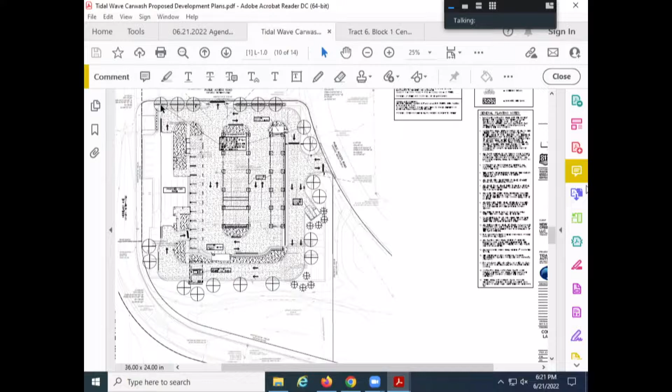I think we should stick with the standard there, it's 25, with an allowance for low shrubs. So if you agree, have 25 being the required amount and you're giving latitude to the strict application of the 25 feet of frontage, in other words, the trees on the east and the trees to the south counting them even if they're not in the front 25 feet of a street frontage, then I think Leslie and I could work on a plan that meets those parameters. Yes, definitely, it sounds like everybody's in agreement that that's what our intention is.

Sorry to make that way harder than it needed to be. I'll make another attempt at translation: as a condition, you would be approving the landscape plan as presented by the applicant's designer with 25 total tree units being provided and the addition of low-growing shrubs between the car wash and Century Plaza Drive.

Exactly. Yep. Way to go, Dean. That sounds like the direction we were going. Are you ready for a motion with that, or in public? Hold on, did we decide, was there anybody on the public? There wasn't.

I would say if you're getting ready to talk about motions, we have the 8 conditions that staff has recommended on 15. And as we talked, there's also a potential 9th, where you could say that uses of the Planned Development District, PDD C5 zoning district, shall be limited to uses permitted in the C3 district plus car washes. That could be a potential 9th condition if that's something you're interested in. At this point, I'm going to close the public comment and bring it back up to the discussion of the commission or a motion.